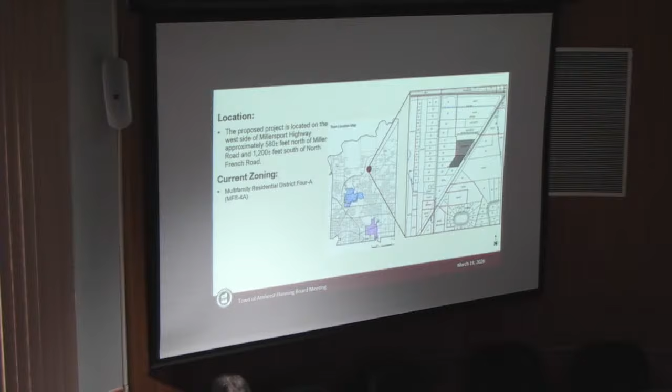Good evening. Jake Metzger with Metzger Engineering at 8245 Sheridan Drive in Williamsville, New York. The proposed project is located, as you said, at 3230 through 3278 Millersport Highway. It's located on the west side of Millersport, between Miller Road and North French Road. The project comprises approximately 2.5 acres across 3 separate parcels, which will be combined into one. It is zoned MFR 4A. That was recently rezoned last year after a recommendation from the planning board and a public hearing, with ultimate rezoning by the town board by unanimous decision. That happened in June of last year.

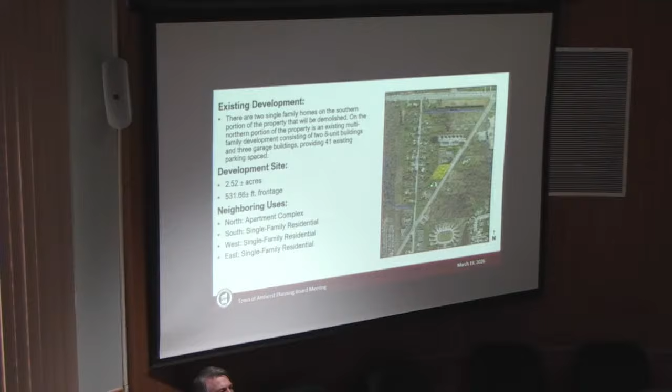The existing conditions of this project, if you could go back 1 slide, sorry Scott. As I said, there are 3 parcels, 1, 2, 3. The 2 southern parcels have 2 single-family homes on them, and the north parcel here is known as the Emily's Garden Apartments, with 2 8-unit buildings. To give you a lay of the land: to the north there are existing apartments. Along the west side, there are single-family homes. Single-family homes to the east, as well as vacant land. And to the south, there's a mix of commercial businesses and some single-family homes.

Next, please. Project description: what they're proposing is to remove the 2 single-family homes on the southern parcels, and then construct a 3-story, 9-unit apartment building, along with parking for the tenants. The building in question is shown in yellow, with parking along the east side and the south side of the building for the tenants.

I just want to point out that the project, as it's presented, is in full compliance with the code. There are no variances that are required for this project.

If you remember, we presented this project back in January of this year. At that time, we were still working through department comments and outside agency comments, fire, engineering, New York State DOT. Since that time, we've addressed all the concerns and comments from those departments, and we've made some adjustments to the plan.

We've moved the stormwater retention out of the easement, which was not acceptable to engineering. We moved that to the south. But most importantly, the DOT has allowed us to maintain what we were proposing as the emergency exit. We want to point out that's only for emergency vehicles. It will be gated and locked. The DOT doesn't want to create more conflict points along Millersport.

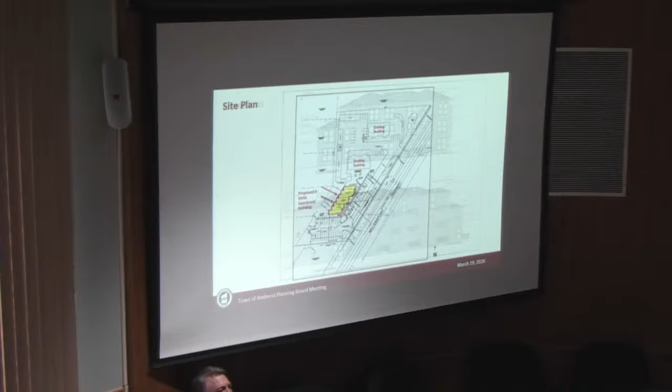Thank you, sir. John, any questions? No. Brittany? None. Harper? No questions. Mike? No, sir. Is there anybody here from the general public with any questions or concerns for Mr. Metzger?

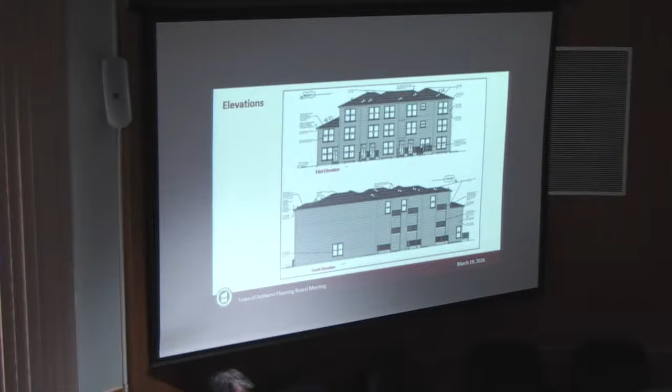Okay, next item, 1540, 1542 Maple Road, Millard Fillmore Suburban Hospital. This is a request for relief of conditions imposed as part of a major site plan approval.

Good evening, board members, thank you for your time. I'm Ryan McCarthy of Hopkins, Sorgi and McCarthy. We are the attorneys for the project applicants, Kaleida Health, and I'm joined by David DeBacco with Kaleida and also by project engineer Chris Winkler. We are here seeking relief from conditions of the major site plan for a proposed Millard Fillmore Suburban Hospital.

That were put into place in 2006. We're asking that the planning board not issue a decision this evening, and we can take this opportunity to discuss the application and answer any questions you may have. Can we pull up the first slide we submitted?

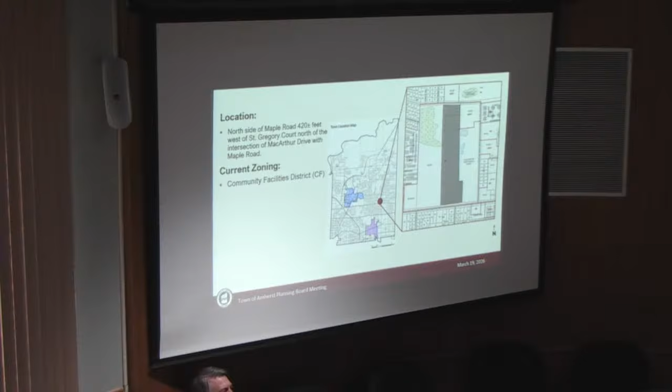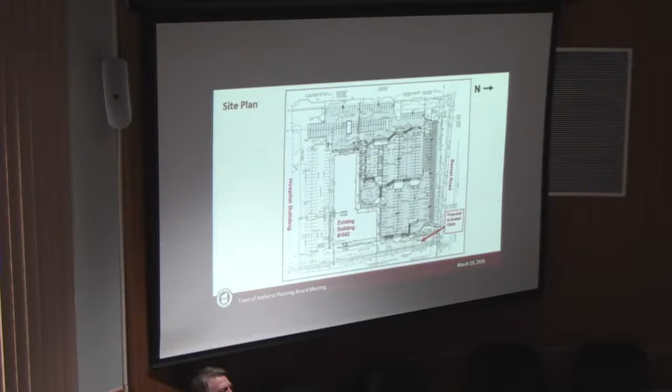There we go, thank you. Okay, actually, go to the next slide. Just a little history here. Obviously, we're all aware Millard Fillmore has been in its location since 1974, providing a 265-bed facility with special care in cardiology, urology, GI, orthopedics, oncology, and a number of other key health areas, and has been a major economic driver for the community in that time. Next slide, please.

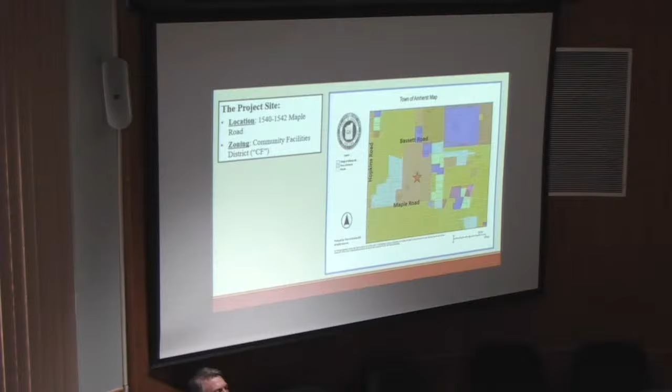Here we have an overview of the project site at 1540 to 1542 Maple. You'll see that the zoning is currently Community Facilities District. Next slide, please.

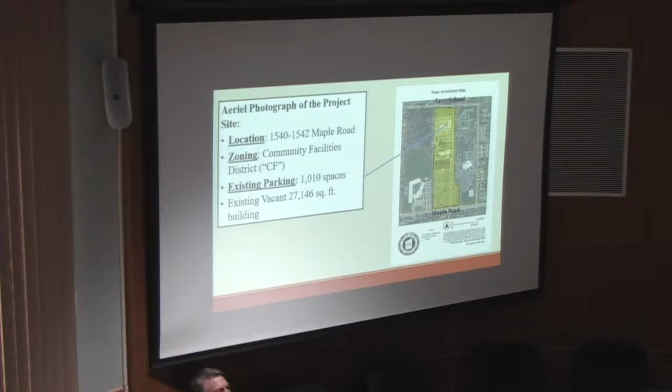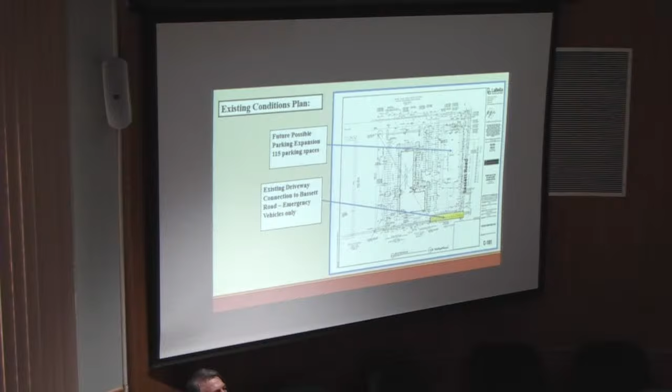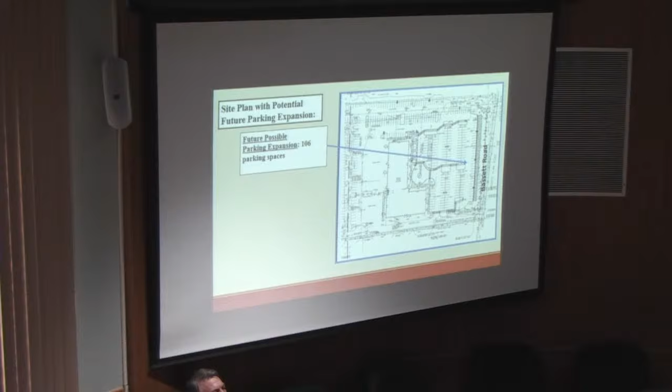Here you'll see the existing conditions at the site. You'll see at the bottom, highlighted in yellow, a current existing driveway connection to Bassett Road, which is chained off and used only for non-health emergency vehicles. And you'll see here potential future parking expansion that has been revised to 106 spaces. Next slide, please.

Okay, and here you see the conditions of the previous site plan approval. It was approved for the 153,000 square foot hospital expansion, and there were 9 conditions to that approval, and 2 of those in particular are the focus of our discussion today.

The sponsor is seeking relief from the site plan conditions imposed by the planning board on its approval on January 19th, 2006, in connection with elimination of off-site parking on St. Gregory's Church property, installation of a controlled gate for employees only, which is going to be limited in number, to access the project site from Bassett Road, where currently a number of employees are traveling presently, and installation of the sidewalk recommended by the TSB on February 4th, 2026.

The 2 relevant conditions imposed that we're discussing are number 5, that the existing chain gate at the Bassett Road driveway be shown on plans submitted for approval upon completion of construction, and access to Bassett Road shall be limited to its current use for non-medical emergencies; and that the approved plan includes 218 off-site parking spaces leased at the adjacent St. Gregory the Great Roman Catholic Church property. Next slide, please.

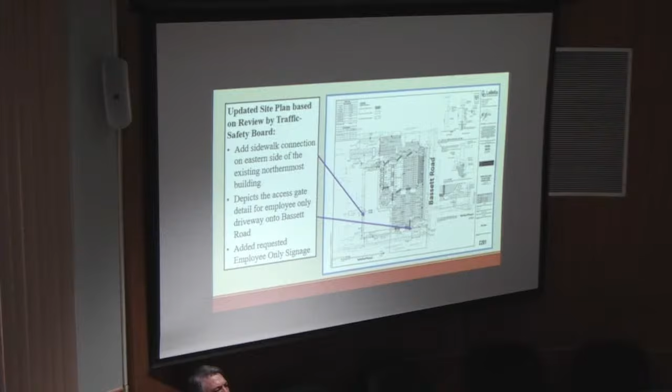Next slide. This better shows the sidewalk connection that we had submitted. We would have to relocate a light pole to do that sidewalk connection, so pedestrians could come from Bassett and then connect up to the existing pedestrian connection.

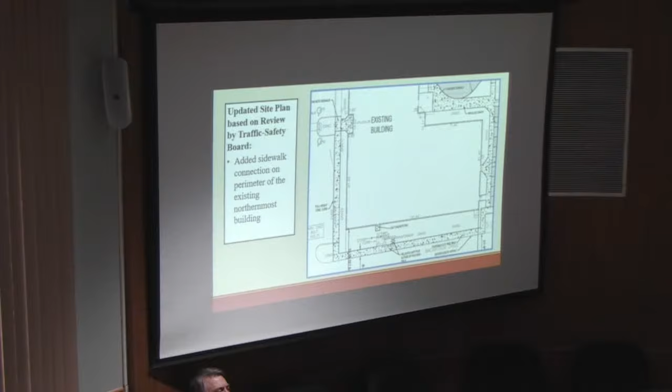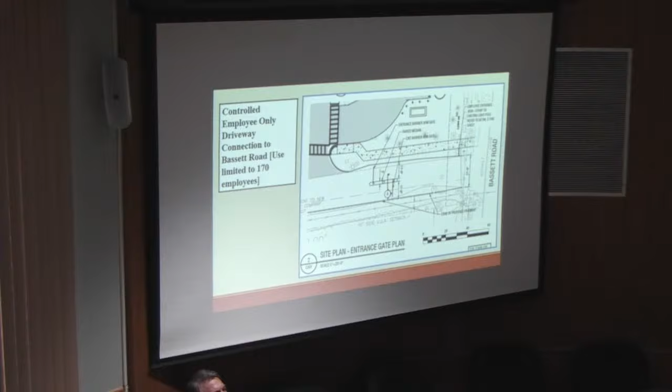Next slide, this just shows the barrier arm gate. It will be on a raised concrete median, 6 inches high, and again limited to 170 employees a day.

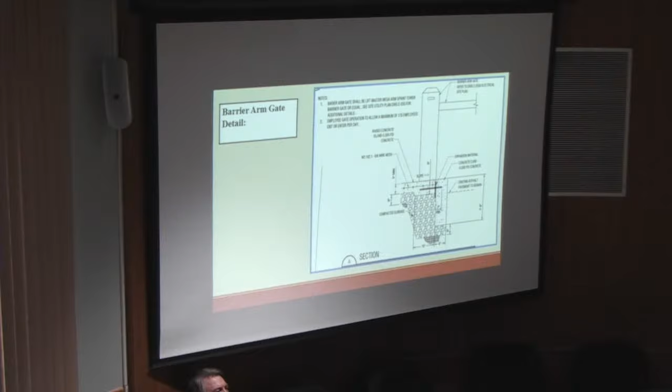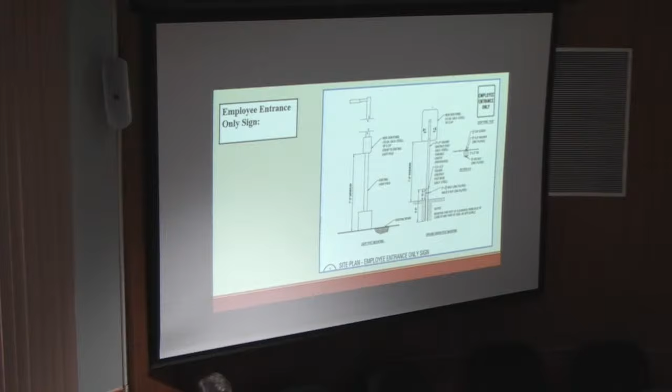Next slide. We also prepared a parking study for the project, recently completed in March. So a few summary points of the study: the employees that park, approximately 160 to 175, previously utilized the St. Gregory's property.

We are expecting that the employees who utilize the St. Greg's property and utilize Bassett will also continue to utilize Bassett when they exit on the Bassett Road.

From the count data that we have of the parking area, there are 1,010 parking spaces. In the potential event of a parking expansion, it would increase to 1,116 spaces.

We are requesting to modify the site plan condition to allow employees only to utilize the proposed controlled access gate to the existing driveway on Bassett Road. We think opening up that chain gate will also help the parking situation, because currently on the northern part of the site near that building, that's the most underutilized parking spot of the entire site, so this will help us fill in that parking area.

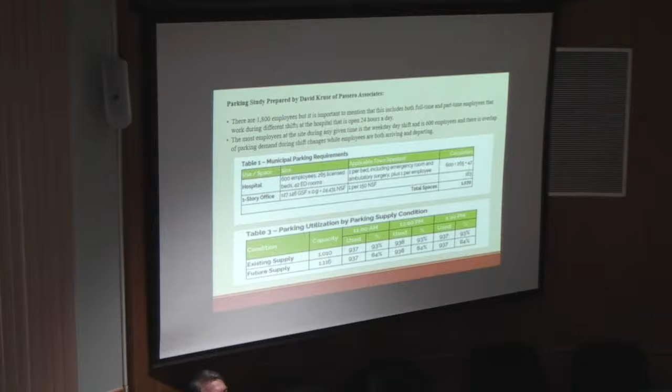I happened to be on the planning board in '06 when this was first brought to us, and there was a lot of discussion about number 5. That came across almost as, okay, we'll do this as a compromise. We actually talked about other alternatives, like should there be a parking garage out front, and other things that were deemed non-feasible.

But to come back now, that was a condition of an approval of the expansion, which was needed and has been a benefit, but to take that away puts us in a position that seems difficult, because if you told me you would give me a Hershey's Kiss if I said hello, then I didn't get the Hershey's Kiss — excuse my analogy, not a very good one — but I guess I'm questioning the justification for coming and asking for what at the time seemed to be one of the prime conditions given in return for the opportunity to go through with the expansion.

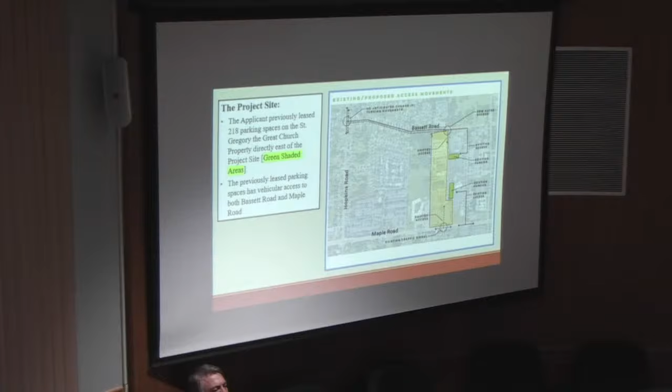And you indicated, for business reasons, the lease was no longer available. Perhaps we have somebody from St. Gregory's to speak to that. I have no idea, but was that, did they raise the rates? What ended up happening, why isn't this available anymore? I don't know that we've said that it wasn't available anymore. There was a lease proposal that we did receive, and for a lot of reasons, and I'm not going to get into all the details here, but for business reasons, we decided not to renew the lease.

Understood. Okay, I see somebody pointing to a man in a clerical collar. I assume that man may be able to shed some light on this.

Okay, the traffic study that was done, I don't know if anybody could speak to this. You indicated it had very little effect. The people entering previously through St. Gregory's to those two green parking lots, did they have to go through any sort of gated thing, or are they just driving right in? They drove right in. We would understand that, however, if that was opened up and there was a gate off Bassett Road, it would be a little bit slower to get into that than someplace without a gate, I would assume. Fair? I assume that would be true.

Yeah, I mean, there's no restriction getting in off of Bassett onto St. Greg's Way. I could pull in at 30 miles per hour or 20 miles per hour like I might be able to do off of something that's unencumbered like this. Did the traffic study take into account the fact that people are going to have to come, make a full stop, wait for the gate to open, then enter in, and then several other people doing the same thing? The traffic study does have queuing estimates from typical queuing, and it has room there for vehicles to queue. We would have to update that for the specific timing on the gate selected and that delay. So it does have a queuing estimate, and cars could queue up and back, but it's not specific to the gate selected. And if I'm understanding you correctly, and I'm trying to be pedantic, but the queuing estimate doesn't take into account the delays by the opening and closing of the gate. We'd have to update that time in the study, yeah.

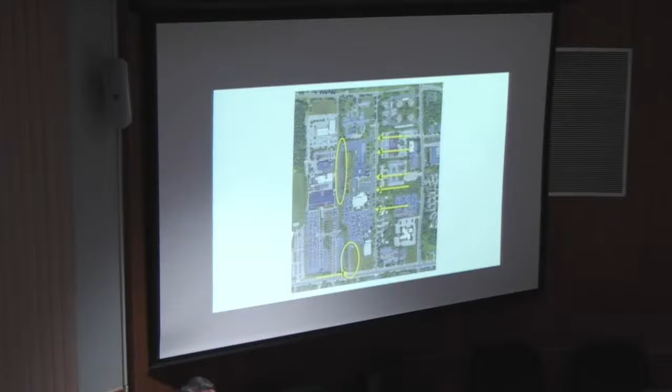Let's zoom out and take a look at the bigger neighborhood. If we can go to the next slide, please. This is just zoomed out a little bit. So P1 and P2 were the previous parking areas, and the arrows are all the same. All this parking is adjacent to Maple and Youngs roads, which are large roads meant for carrying traffic east to west and north to south.

It's unlikely that employees commuting north would instead go up St. Gregory Court through a 20-mile-per-hour school zone. There's St. Greg's School right there, and it's often packed with cars lining up and down the street, dropping off children, and school buses as well.

Then they go down Bassett, stop at the stop sign at letter A there, and then go out to Hopkins Road, which has no turning lanes or lights and is extremely busy and difficult to turn onto, as admitted by the study.

Another quote from the presentation last month was: 'I can tell you that the majority of the employees that parked at St. Greg's, they also have requested access to Bassett Road through our request here tonight. They exited out to the north already,' which we heard similar stuff tonight.

When pressed on that point last month, they clarified: 'I mean the folks who want to exit out toward Bassett parked in St. Greg's because they knew they could get out to the north. So no, I'm not suggesting that all 170 cars all went out toward Bassett. It's probably the vast minority who went out Bassett. Still, a vast majority go out Maple Road.' That's a quote from last month.

So if the vast minority were going out Bassett previously, as stated by the hospital, what relief does the gate offer? Why give access to 175 employees in that case? These would be new trips, and you would be making Bassett Road more convenient, since it's now more preferable than the hospital's single Maple Road exit, which would mean more new trips, unlike what is stated in the traffic study, which claims no new trips.

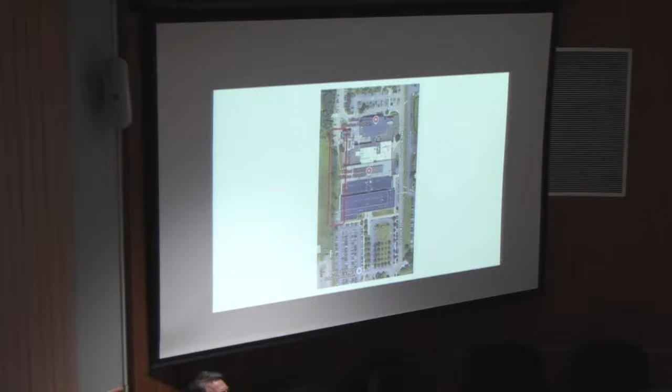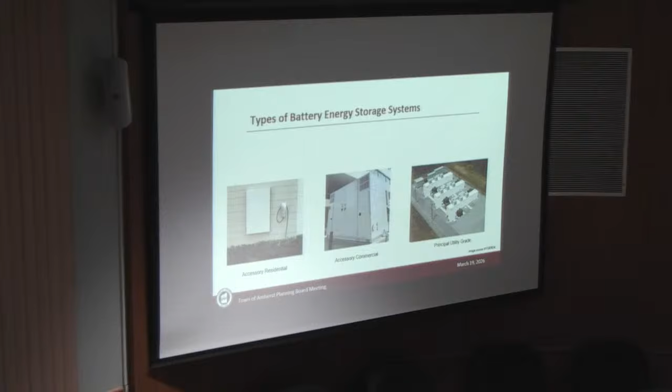This is just an example of existing types of battery energy storage. What we are not regulating with this ordinance are accessory battery storage systems, such as you might find in your residential home. We're seeing individuals purchasing Tesla battery packs now as auxiliary storage in the event of power outages. And we're seeing commercial industries also providing for accessory commercial battery storage. What this proposal is actually going to regulate is what you see in the right-hand slide, and those are principal utility-grade battery energy storage systems. Next slide, please.

The basic components of a battery energy storage system involve a series of battery cells, lithium ion in particular, that's what the industry is using now, stacked together in battery racks within what are essentially storage cabinets. They used to be stored in storage containers, but now they're moving to a storage cabinet because they're more accessible, particularly for emergency responders should the event of a fire occur. In addition to the battery storage units, you have the power conversion systems, which is the inverters, which take your DC power and step it back up and bring it online to the grid, which we all use.

Next slide, please. Again, the need for this ordinance amendment, as I indicated earlier, there's an increasing demand to build battery energy storage systems regionally and throughout New York State as the demand for electrical energy is increasing. New York State has identified a statewide energy target storage of 6,000 megawatts by the year 2030. This is a state initiative to increase the resiliency of the current grid within New York State. 450 megawatts are currently deployed in New York State in the form of battery energy storage. 697 megawatts are currently in the pipeline within New York State through NYSERDA and the utilities. And as I indicated previously, New York State Energy Research and Development Authority, or NYSERDA, is providing enticements of up to $1.6 billion over the next several years to increase the community's need for energy storage.